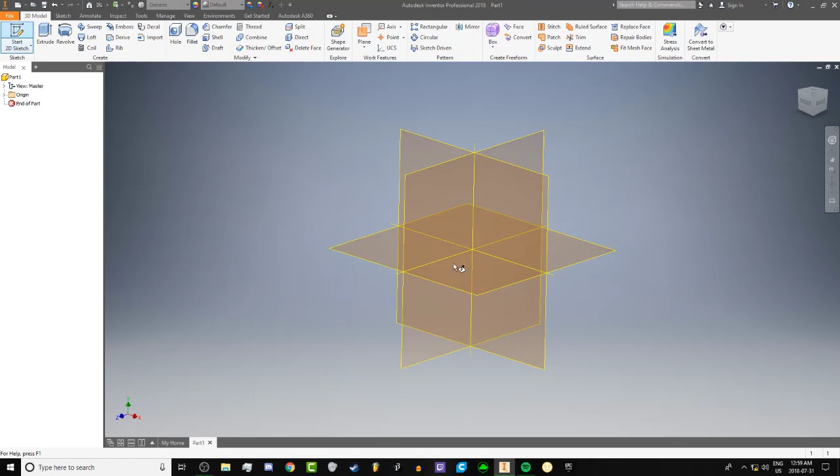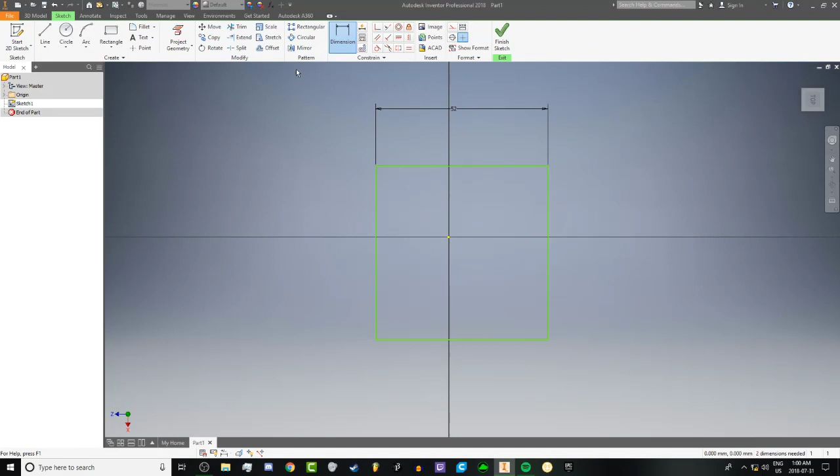However, since most of the principles on how to design a cube, a basic cube like this, were covered in my 3x3 tutorial series, I'm not going to be doing this in a multiple-part way. I'm going to just be doing it all in one video. Since this is a 2x2, it's not going to be as big, but I am going to make it fairly large, because for FDM printing and to make sure the stock's big enough, it's easier to make a good mechanism if you make it bigger anyway. Not sure what the standard size is. I think standard size is 50, but 52 works nicely. Plus, it's nice to have a bigger 2x2 for a change, since nothing mass produced that's decent is this large.

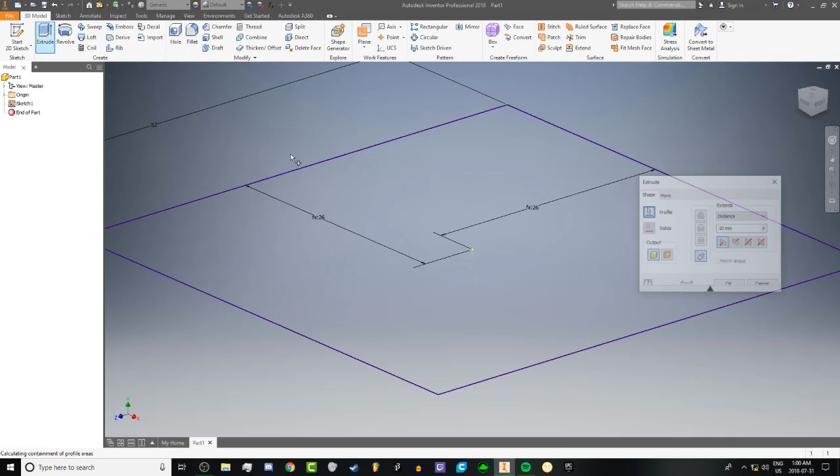Now, one of the key differences when designing this is the sketch. When you do a 2x2, you don't divide it up evenly on the outside. You start in the middle instead.

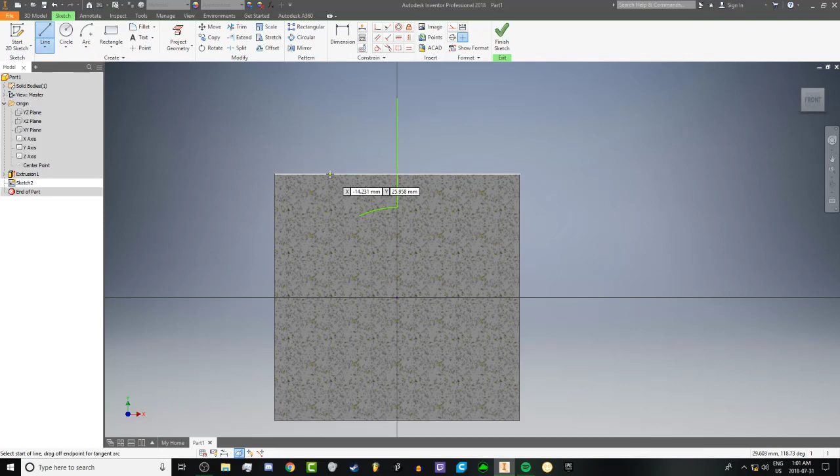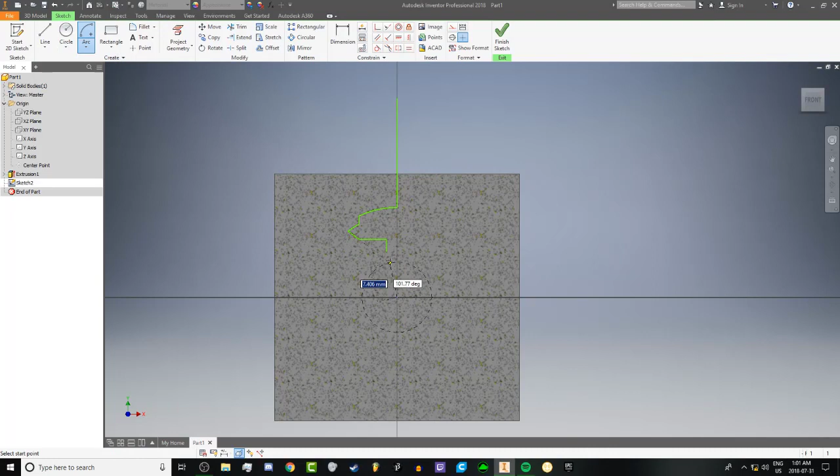So I'm gonna just go down. I'm gonna do it incorrectly at first, and then I'll dimension it afterwards to make it correct. You want to use the center point arc here—this is that inner part of the center that you see on 2x2s. And you just want to go down. One thing you might want to do as well, to make sure there is a corner stock, is do the same thing as you would do in a 3x3, like this, and then go in, down, and then we're going to add the torpedo. Now we're going to go down and do the final arc.

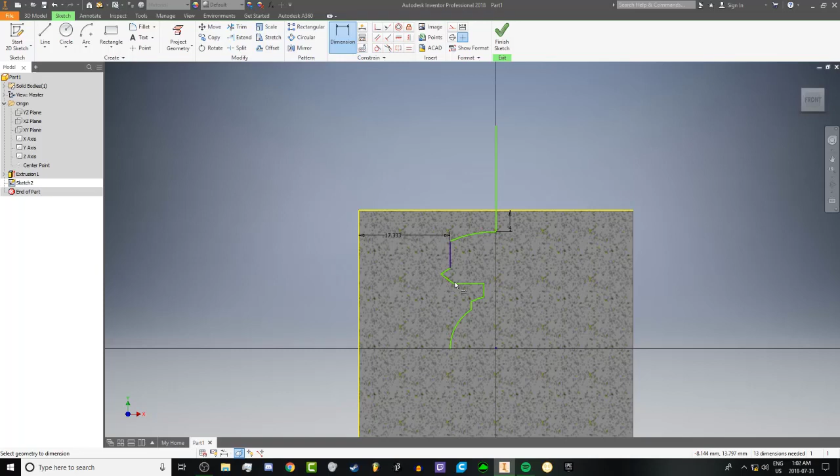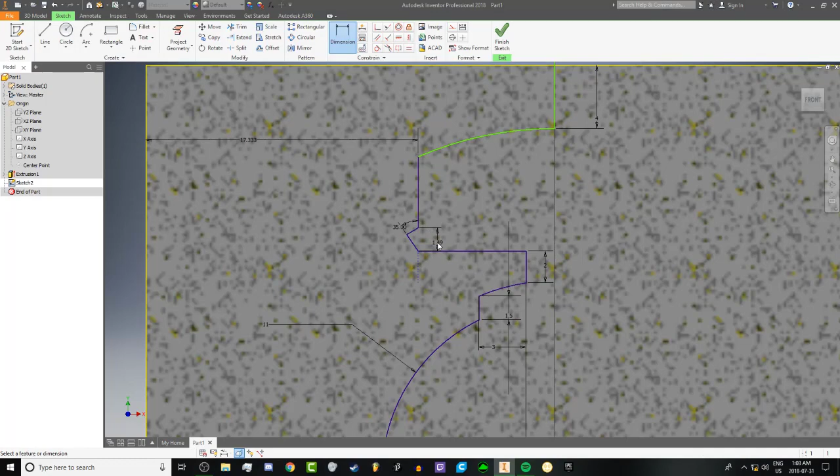And make sure that this part here is directly underneath this line. There you go. So you gotta make sure that this is also dimensioned like so—3 might not be the greatest number for that, but I'll give it a shot and see. Make sure that this stays in the middle.

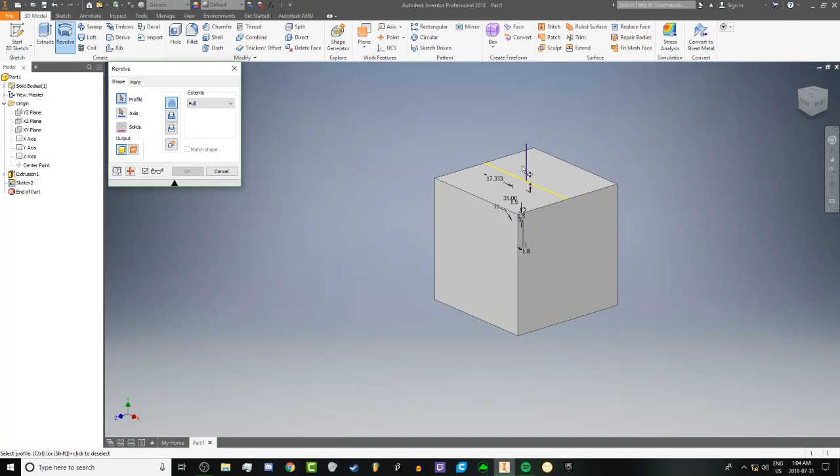Now that everything's purple, you can see that the sketch is good. It's fully constrained and all that, so there you go. So now we're going to do the usual procedure, and we're going to take this line and revolve it. There we go, perfect. Then we're going to do the usual drill and circular pattern.

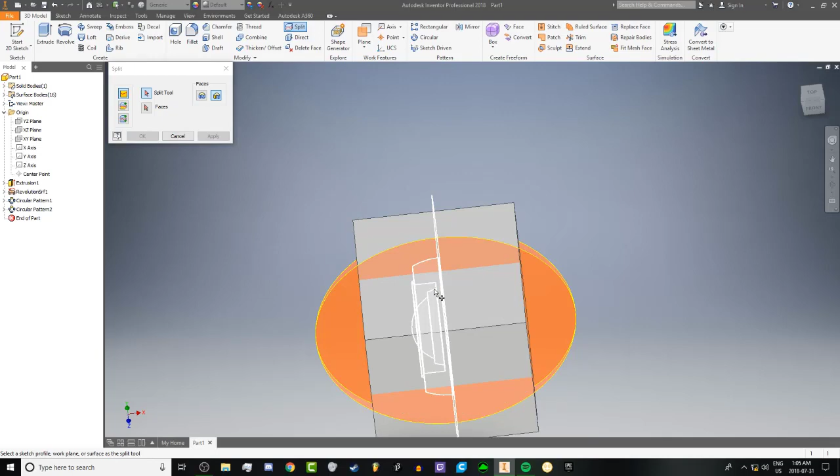So now we have all our cutting surfaces done, and we're going to go ahead and split everything. One way you can do this—because in a 2x2 you need that corner that's connected to the core—the easiest way, which is what I'm going to show you, is you just don't cut. You got to see this cutting plane, how the cuts are facing away from this corner over here. Use that one, not that one. Not the one that goes in like this, all around it—that way it's connected to this core.

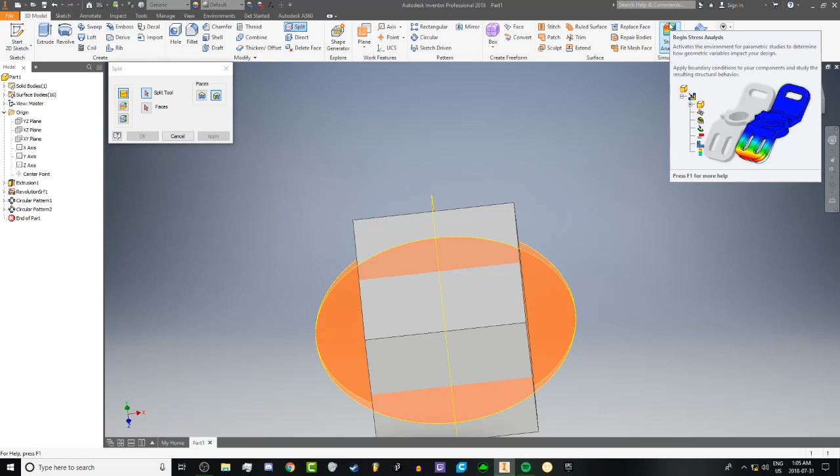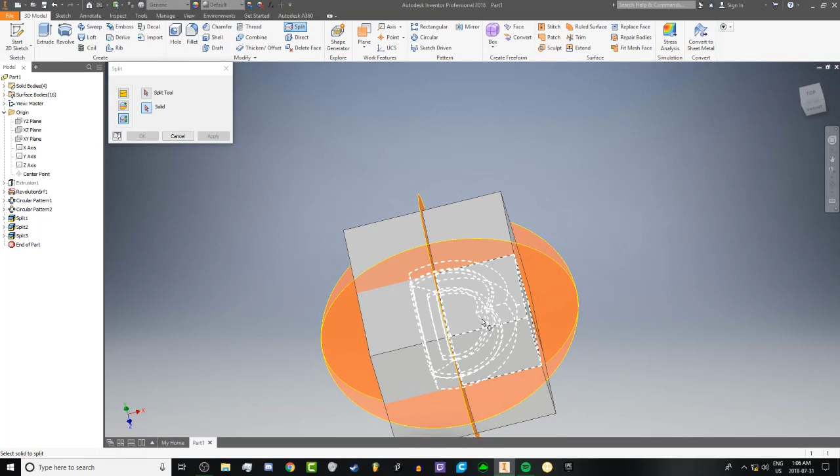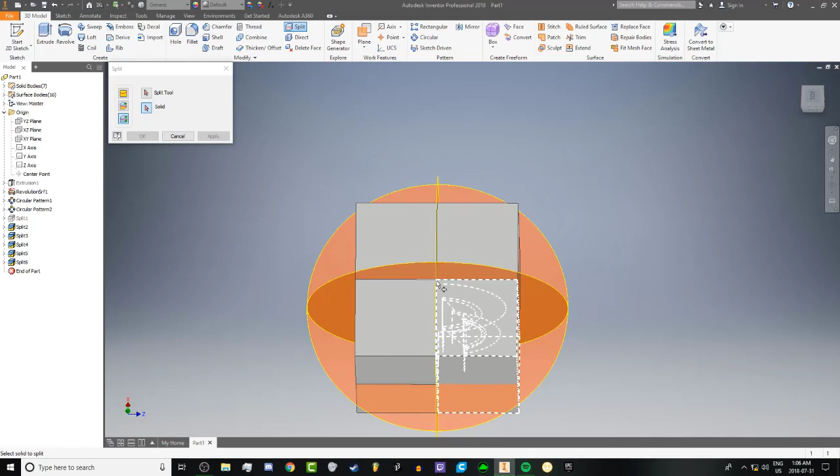So here we have our corner that's attached to the core, and now we're going to go ahead and cut up a normal corner, trying to make sure that you only use the surfaces that do cut into it. So now we have a normal corner, a locked corner, and now we need to make sure that we have an edge. So we do—I think, yep, that's an edge. Alright, I think that should create the center for us.

So let's go ahead and save this. There we go. And now we're gonna make sure everything's set. We're gonna grab our corner, we're gonna grab our other type of corner, we're gonna grab our edge. And okay, now we know the center's not good, so we're gonna fix that in a second.

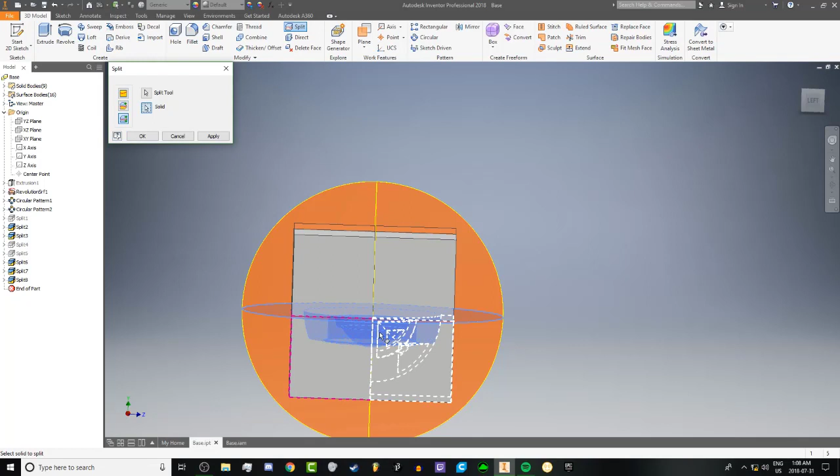So now we're going to split, and we're going to use this tool on the center once we can select it. Perfect. Now let's make sure that's good. Yep, okay, now we can actually add it to the assembly. There. And that should be everything.

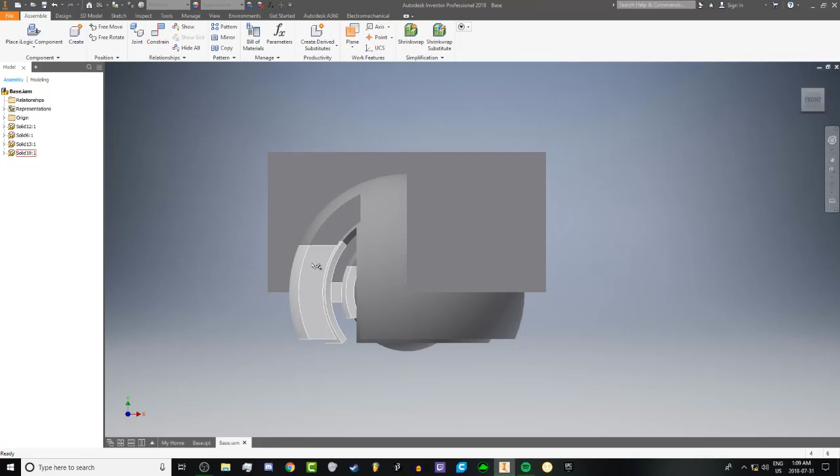So there we go. So now we have, as you can see, the corner that is connected to 3 centers. So we are good with that one, which is also part of the ball core—we'll be removing that sphere later. Then we have our actual centerpiece, then we have the corner, and then over here is the edge.